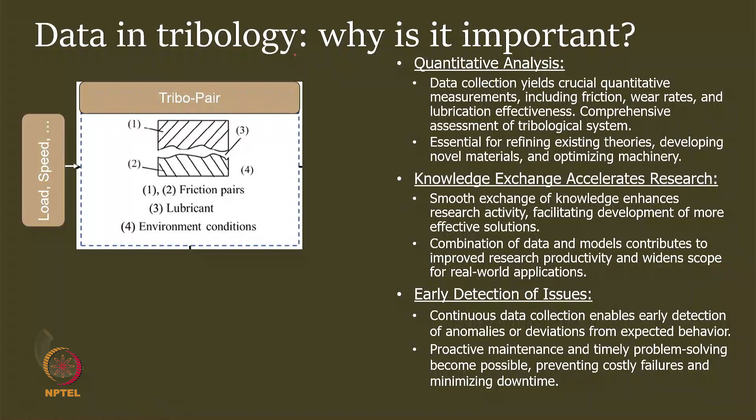Let me start with some initial topic on tribology. We say what is the real importance of data in tribology. We have already studied that in tribology we have two surfaces and we use the word tribopair. So 1 and 2 is a friction pair. To avoid wear and friction, or to reduce friction and wear, we require a lubricant. And we get a number of data related to this.

But the major issue comes from the environment. Most of the time environment changes from one lab to another lab, one situation to another situation, and that makes more difficulty for us. Reason being, even though speed and load parameters are same, environment parameters are changing, so results may be somewhat different. However, whatever we can extract from literature, we try to extract. This literature data will help us in a quantitative analysis. They will provide knowledge to us, and they can provide some sort of early model to detect the issues.

So coming to the quantitative analysis, data collection yields crucial quantitative measurements that include the friction data, coefficient of friction or friction force, wear rates, and lubricant effectiveness. The lubrication effectiveness can only be compared when we know the friction values and wear rate values properly. So overall, it helps in a comprehensive assessment of tribological systems.

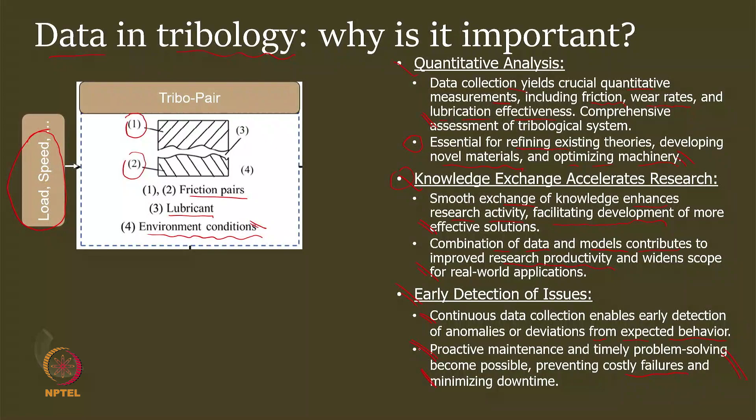Coming to the early detection, here again we require some initial models and online, or maybe offline, collection of the data. Those will help to provide the expected behavior and how the component is behaving in a slightly different manner, and this helps us to come up with a proactive maintenance strategy and solve the problems much earlier compared to costly failures and downtime. So we can bring an economic solution while keeping downtime minimized. So this is overall important to us.

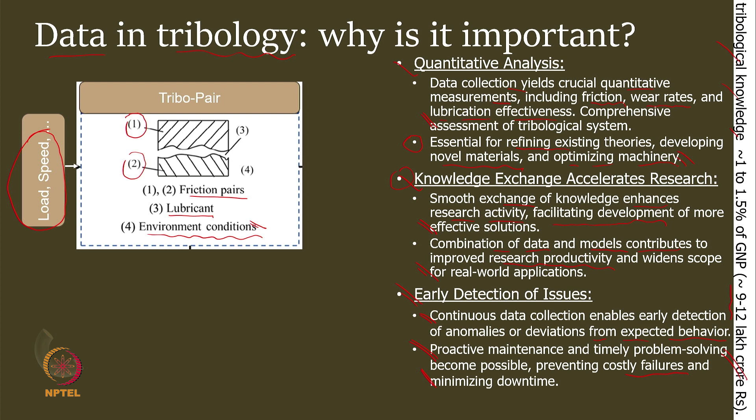We already studied that if we implement tribological knowledge in India itself, it can save roughly 9 to 12 lakh crore per year. That's a huge amount, and that's why we require this kind of knowledge. How do we go ahead with this? We generally get the signals related to friction and wear, and lubricant effectiveness can be calculated by whether friction is reduced and wear is reduced or not. We require a number of sensors. It can be a temperature sensor or pressure sensor. Here it can be an atmospheric pressure sensor as well as a contact pressure sensor.

We require a pH value, particularly for the lubricant. If it's getting acidic, we require pH values. We require environmental humidity, or if water is getting mixed with the oil, then we really require the value of that water content. Every mechanical element in the system will vibrate. We will detail this in the next lecture.

We get a number of wear debris, and if we have a wear debris sensor, it really helps. Nowadays a new thing is coming: image. You take an image and analyze it, and image analysis provides a lot of information to us. So capturing images and analyzing them is coming out to be a very big tool, or we say the sensing unit for us.

Many times we calculate the wear volume using the surface roughness or change in the surface roughness. We measure the viscosity, film thickness, hardness, and various parameters. So we really require various sensors, and these kinds of sensors can be utilized after what we have already captured, or dig out the information from existing literature, and after that we are assembling it.

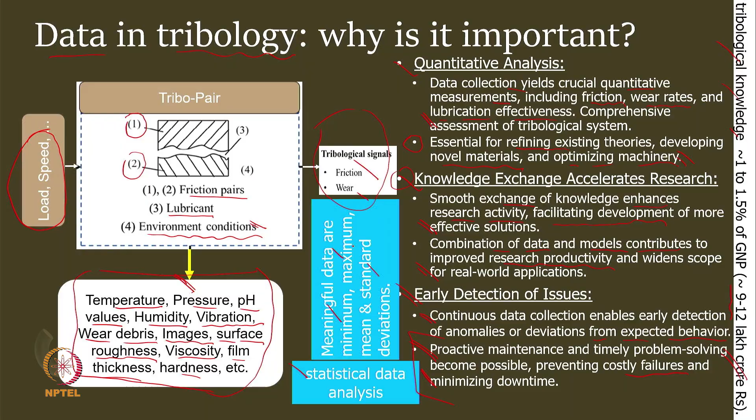Now, whatever we do, all the data with temperature, humidity, pressure, pH value, everything is statistical. We don't get exactly one value if we take different samples. That's why we go ahead with minimum value, maximum value, standard deviation, mean value. So whatever tribological parameter or data we are getting from a sensor remains statistical, and we need to quote minimum value, maximum value, of course the mean, and standard deviation.

So to plot those results, we really require more meaningful variation. We should really point out what is the mean value, what is the max value, and the standard deviation.

Now, when we talk about data, we need to think about what the data sources are. We divide them mostly into two big subdivisions: primary sources and secondary sources, and this data relates to friction, wear, and lubrication. Otherwise, there are many data. People talk about interviews and filling forms and all. We are not talking about those things. We are here talking only about friction quantitative data. Qualitative data we are not talking about in this case.

Let's take friction, which we have already described in an earlier lecture, but I am trying to repeat here. It is a measurement of the force resisting relative motion between two surfaces. It is very critical to minimize energy loss or go ahead with energy efficiency. We can use a load cell to get friction force data, and sometimes we use a torque sensor. In one of my setups I use a load cell, and in one of the seal units I use a torque sensor, and both give good results.

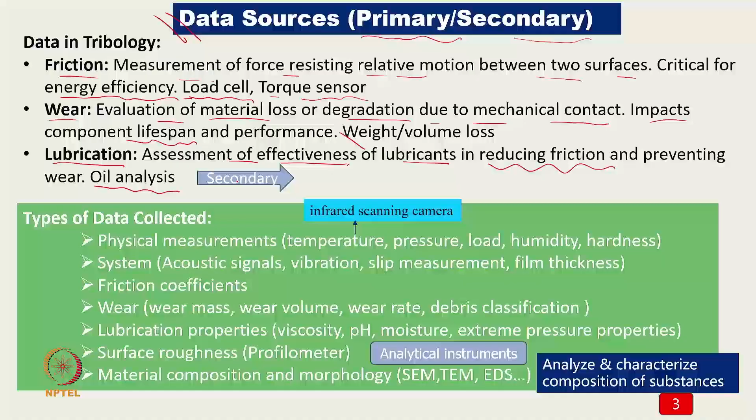Now coming to the secondary data, we have already studied this slide in lecture 20, and we found that there are a number of units or sources available which provide tribological data. Of course, it is not available openly.

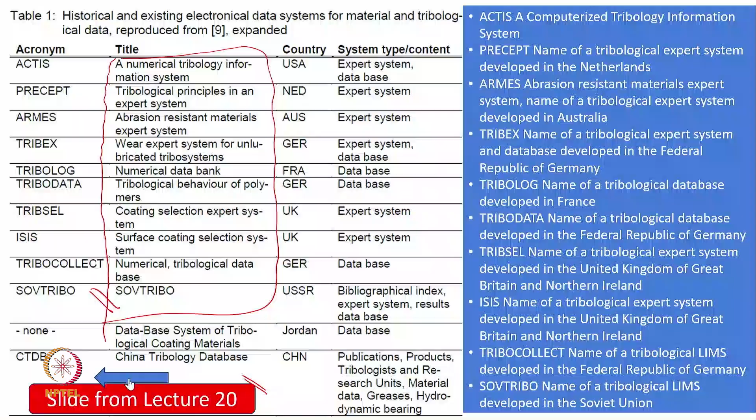But when we approach the authors, they may provide us some information on that. So if we are using this kind of data, or any research publication or any book which is quoting that data, we can utilize those data, and that will be called secondary data in this situation. And coming to the primary data, we need to collect data on our own.

Either we do the simulation, but I prefer to go ahead with more experimental analysis, because if I go ahead with theory and try to define that, again I will have some sort of simplification. So I prefer to collect the secondary data first, come up with some sort of model, and go ahead with some sort of experiments. So instead of doing too many experiments, I will do fewer experiments, but will get a lot of knowledge from existing literature, from a book, work on that, come up with the right model, so that our overall results are in our favor, or much more robust results.

Sometimes people use the words physical measurement, system measurement, friction coefficient separately, wear, lubrication property, surface roughness, and material composition. But again, these are subjective. We don't want to go ahead with this kind of division. We say, yeah, we can measure the temperature. The thermocouple, or these days we are saying that an infrared scanning camera is a better option, because it is non-contact; from a distance we can measure it. Of course, every time we require calibration. If I don't do calibration, it will not give good results. Pressure, load, humidity, hardness, these we can sense, or we can measure also.

Coming to the system level, where not only the individual but the whole system is getting involved, like acoustic signals, vibration, slip measurement, film thickness, where the two surfaces are coming into contact, and we are trying to measure the gap between them, and assuming this is the film thickness. Friction coefficient we already discussed.

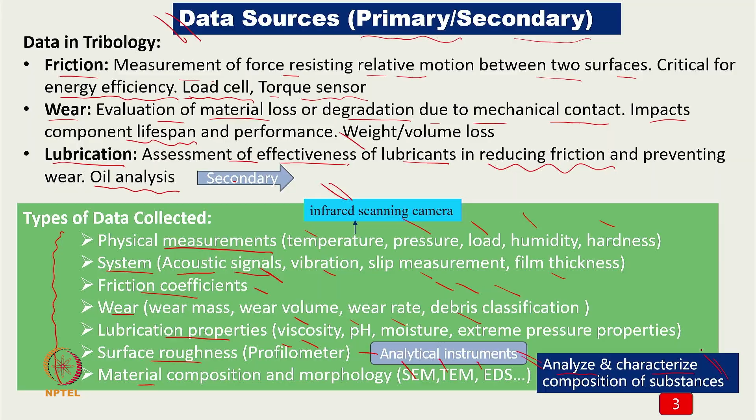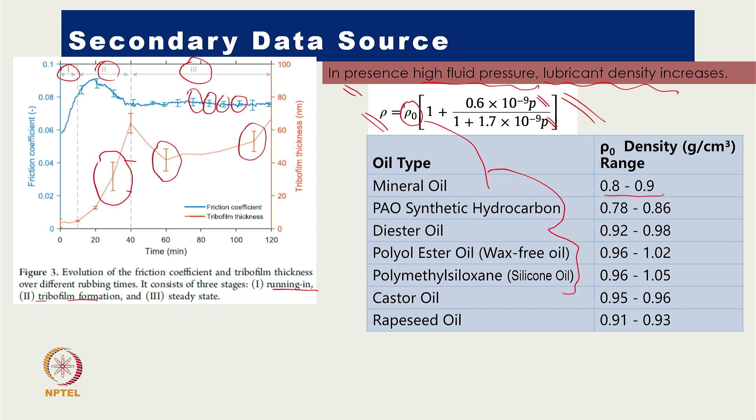Instead of going ahead with a firm or 100% belief in this relation, I'll take some sort of a judgment, and maybe directly or indirectly I'll try to verify this data. So again, any relation which is available in literature will help us to understand the system, but it cannot give 100% results to us. So that's why we say we learn from secondary data and then use our own experimental setup or our theory to come up with the right results.

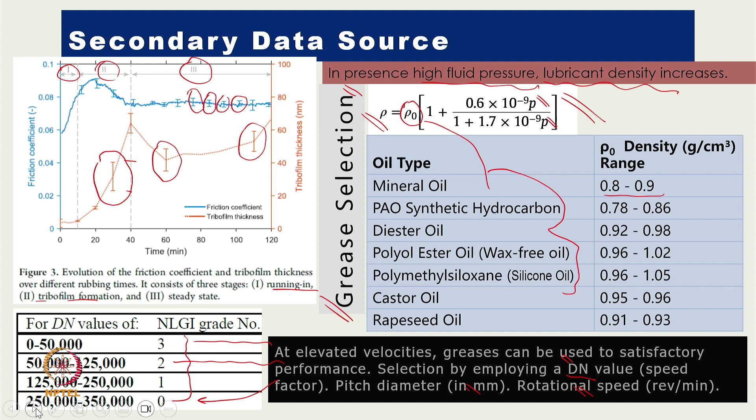It says very clearly that most of what people have given earlier was for NLGI 3, then NLGI 2, NLGI 1 and NLGI 0. Of course, we have double zero and triple zero also. Those are also greases; it's not that those greases do not exist. Those are greases we talk about as thin grease. They may require some sort of lubrication system, but not as good as a liquid lubricant. So you can see here that for a 2.5 lakh to 3.5 lakh DN value, NLGI 0 can be utilized.

So we learn from literature. One book, one article may give one piece of information, another article may give another. We need to extract the reason behind that. If the reason is valid, we should understand it and then implement it, and that's why we are saying machine learning algorithms will help us. The reason being, we are extracting information from various sources, and which source will give me more reliable results I do not know exactly. So we come up with a justification, tabulate everything, and finally decide how we go ahead.

Again, machine learning is continuous improvement. It is not that because somebody has written in a book that grease should be selected for up to 10 meters per second, that is the limit. It's possible I can go ahead with 15 meters per second, but what variation is required? How do I go ahead? That's where understanding or innovative thinking is required.

Now coming to the primary data source, generally we have environmental sensors, so temperature, pressure and other environmental things can be captured. We have a laboratory where we do oil analysis. In oil analysis we can measure the viscosity and FTIR, as per what my laboratory has, but it is not restricted to only this; there may be many more options. Coming to characterization, we use SEM, TEM, EDS, and surface profilometry, and many more are possible. AFM I don't use, but AFM is also possible. We use a tribometer to find the coefficient of friction and wear, or wear analysis, or the wear loss.

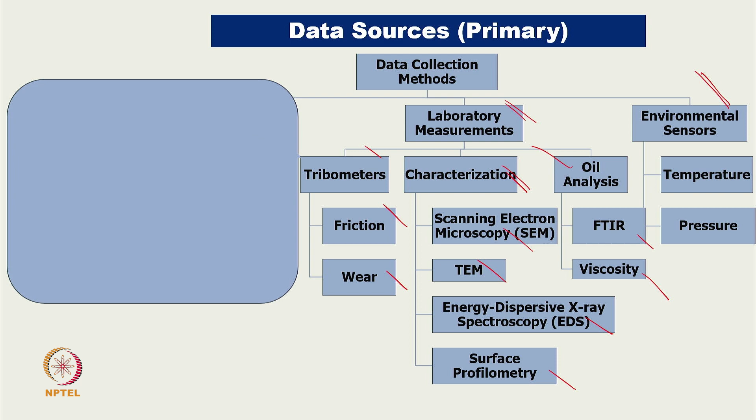Coming to this, what we mostly say is offline analysis. I'm using the word offline analysis. I can't do the experiment inline or in situ. Here we can use a measurement in situ, particularly for the tribometer, but again the tribometers are only simplified tribo pairs which we use. We don't use actual experiments, and for actual experiments, actual in situ measurement, we use a number of sensors.

Like, I use oil analysis using a sensor. We count the particles, we use a sensor. We have a quality index sensor. So these are the sensors. We have a load cell, we have accelerometers. So they can really give in situ information. What is the meaning of in situ? We say measurements are taken directly from operating machines or systems.

Again, I'm not simplifying the way it has been done in the tribometer. In the tribometer, we simplify the tribo pair so that I can conduct a greater number of experiments in less time and with less noise. Reason being, tribo pairs are in well-controlled conditions. In actual systems, actual machinery, we don't get that kind of complete hold on that, and there may be a number of causes also.

Let's take the example of the gearbox. A gearbox has gears. Maybe if it is a single stage, then only two gears. But if it is a planetary or a multi-stage, then more gears. Then every gear pair will have some sort of supporting elements. So maybe rolling element bearings, maybe some sort of seal, maybe with some sort of tension, so that it can be located properly. So overall a gearbox may have a number of components.

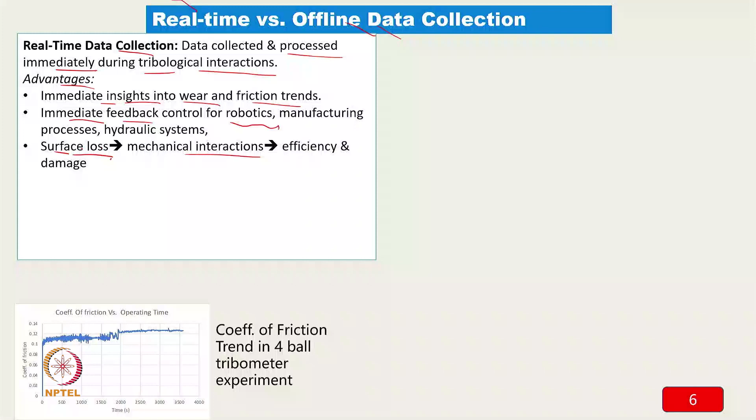So that's why we use in situ measurement. That's what I mentioned, that the future is that we should be able to predict the surface in situ, how the surface is changing with time, so that overall results are in our favor. If we are able to do that, then efficiency can be improved and the damage can be reduced to a significant level. I have shown in situ measurement of the coefficient of friction, which we did on the 4-ball tribometer. You can see here initially the coefficient of friction is roughly 0.1, and with time it has increased to 0.12. So this is very important to see how the changes are happening.

Now, in this case, I have given a couple of examples: we do wear measurement using the wear debris, by counting the number of debris and size distribution, and we also do friction measurement directly in engine components, because we need to really come up with the right result, and which interface is really giving a high coefficient of friction. That's more important. We also do oil monitoring online. We have sensors, so we do it.

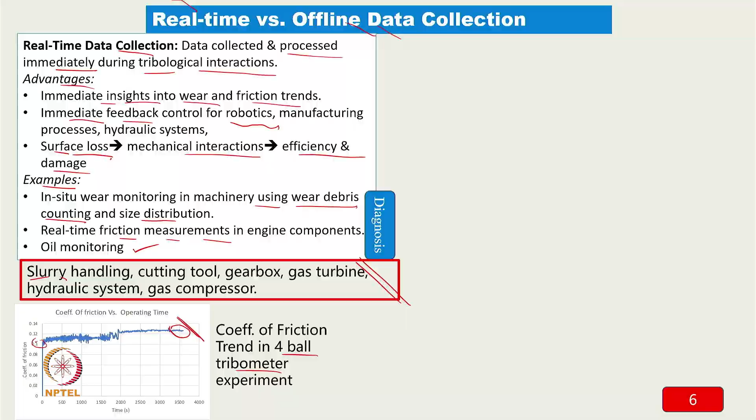Now there are a couple of systems where it is very essential to go ahead with in situ measurement. Say any equipment which is handling slurry: if it is not costly, then there is no need. But if it is costly and the reliability requirement is on the higher side, I'll go with in situ measurement. Like machine manufacturing, cutting tools, or gearboxes, particularly a gearbox which I'm not able to reach immediately, like a wind turbine gearbox at a very high height. A gas turbine, where the temperature is very high and we cannot reach directly. Gas compressors, hydraulic systems. These are the units where we essentially require real-time measurement.

Of course, these measurements are also required along with diagnosis capabilities. So we keep getting data, and then we should have an algorithm to diagnose what is really happening. Coming to offline data, this is also very important. It's not that we get only inline data and then we'll be fine. Offline data is also important. We say it is data collected and analyzed after a tribological event which has already occurred. What are the advantages? We get overall analysis, so here overall analysis is important. Let me give an example.

When we are using wear debris analysis, we get some data, some value, because whatever the sensor is able to record, that value comes to us. But sometimes wear debris generation is much higher compared to what the sensor captures, so we get more wear loss as a result. When we do offline analysis, we get a greater number of debris particles, and that is very important to understand. And when we do this, we are also able to keep a record, and it will be useful for maintenance purposes or for historical purposes; in short, it can be used for long term analysis. So recording is very important.

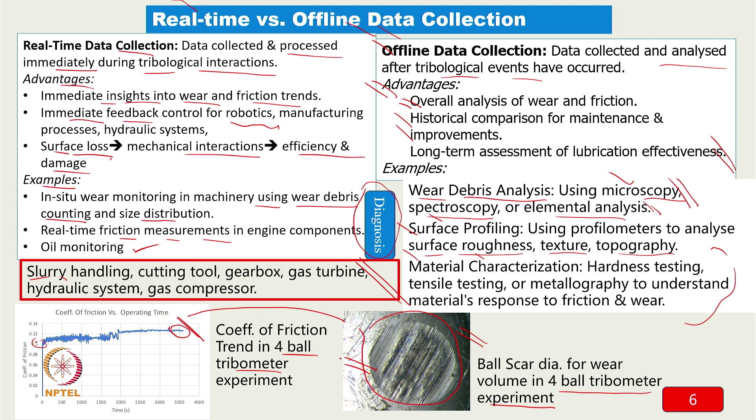This is important. I'm showing one of the images which we collected from 4-ball tribometer experiments. Here the ball has roughened completely. You are able to see that roughness on this surface, a very rough surface after the testing, and thus we do not get an immediate response or in situ response. In situ we are able to get a coefficient of friction, but why the coefficient of friction is behaving like that can come when we do a post analysis, after completion of the experiment.

There are several benefits of collecting data. It provides insight into system behavior. It allows the optimization process to be started, and it really gives a verification of the theoretical model. It also ensures quality control. It reduces the cost. One of the important things is that it really considers the environment and safety. It is very important, and it also provides an opportunity for innovation.

Now, insight into the system behavior, reason being that tribology is a very complex phenomenon, and we are not able to understand all the interactions immediately and how they will behave. Once we start collecting the friction, wear data or lubrication data, temperature data, or even humidity data, then we can really think about how the interactions are behaving, and we can monitor the interaction in real time.

And it also gives the different kinds of variables, like I'm initially assuming 10 variables will affect the overall system behavior, but later we realize 5 variables are much more sensitive compared to the remaining 5. So that means whatever we initially hypothesize, we can also correct, because we understand the system in a better manner.

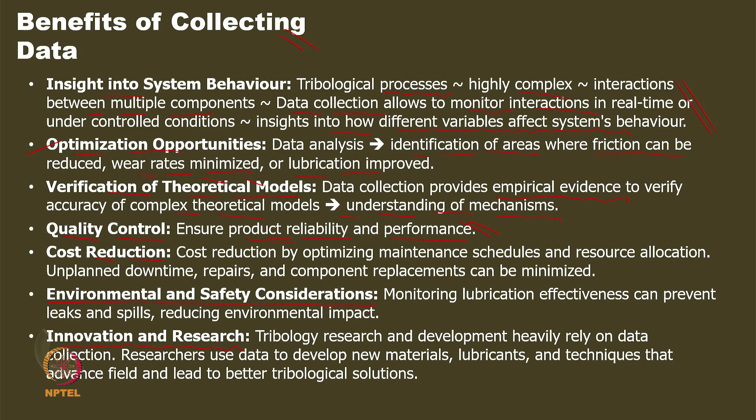However, if this kind of cost is on a higher side compared to the tribopair cost, naturally we will not be able to do it. So there is a need to go ahead with innovation. Wherever sensors are getting costlier, and the system responses we are getting from sensors are getting costlier, we really need to innovate. We need to bring some sort of cost effective sensor, cost effective solution, cost effective strategies in the situation. If we are able to do that, we will be able to save the cost.

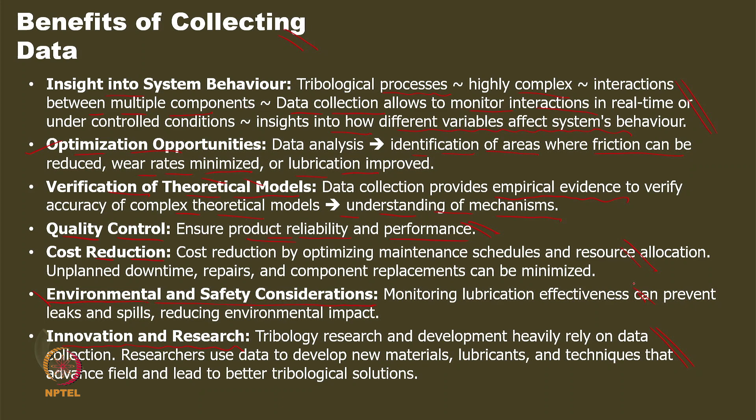And as mentioned in one of the earlier lectures, we want to refabricate so that the system can be used, or the component can be used, or the surface can be reused. If that's possible, then it will naturally save the environment and we will go for more sustainability. Even if failures are not happening, it is going to help us a lot. And now in this case, one of the important things is sensors, which have a huge market. The compound annual growth rate is around 18%, which is huge.

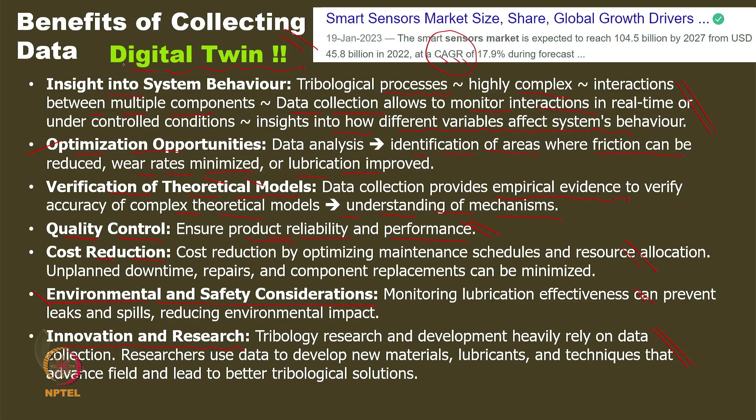And there is a new term being coined these days: digital twin. Can we replicate whatever is happening in the real system in a simulation system? If that's possible, it will help tribology in a big way. That's why I'm keeping two slides on digital twin. When we think about a digital twin, it enhances tribological knowledge. It's unfortunate that awareness of tribology's potential to reduce CO2 emission is not known to many people. It also enhances sustainability, and that information is also not available to many people.

Now you talk about power plants, automobiles, turbines and wind turbines, gearbox failure. Everywhere energy efficiency and sustainability come from a friction and wear point of view. That means tribology plays an important role. Let's take one example of the wind turbine. It's now a growing source of electricity because we are talking about renewable energy, either solar or wind, and wind and solar are playing a major role. Now they encounter downtime and efficiency issues. What are the reasons? The major reason is the gearbox.

They mention that around 76% of all the failures are because of gearbox failure. Again, gearbox failure is because of bearing failure. Even though it is a gearbox, gears are not failing, but bearings are failing first. So you need to know about those things. Now why is it happening? Because there is fluctuating wind and grid load. The load is changing continuously. That means there is a dynamic condition. Predicting the dynamic condition may not be easy. So we really require in situ sensors and in situ actions.

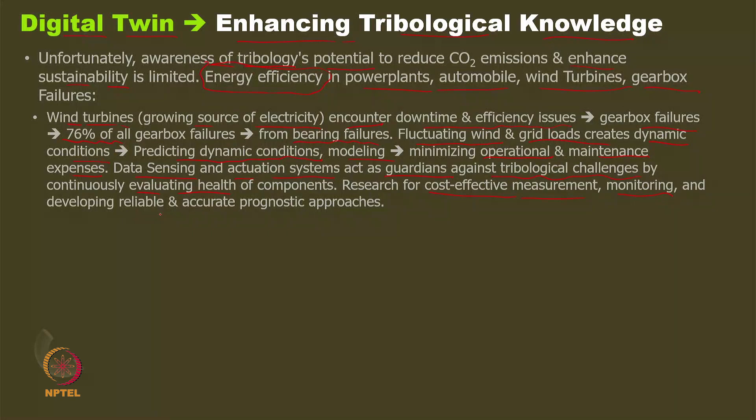We require monitoring. If wireless monitoring can be done in a much more effective manner, or we can provide some sort of digital twin system, where what is happening on the top, at the height, is projected in the lab, and not only the sensing unit but a replica of the system we are operating, then it will provide much more optimum results to us. So that's the future. That's why we say it develops reliable solutions and accurate prognostic approaches.

Now we are talking about something like a cyber physical system in tribology, because it's the most complex system, and we want to understand what's happening at the nano level, so the best is to go ahead with a cyber physical system. That's why cyber physical system in tribology means modeling a physical system in a digital environment to simulate the real machine behavior.

So this is what we are saying: a type of cyber physical system is a modeling of a physical system in a digital environment to simulate the real machine behavior. Not only this, when we have a physical system, it has a number of sensors, so we are able to see each and every sensor properly. We are able to model and then do continuous monitoring. Continuous monitoring, continuous control, and optimization of equipment performance is possible using this.

This also helps to enhance the service management, increases the product life, and in this case whatever software or model we had developed earlier also keeps getting updated because we are getting all the data. So initially we designed some system, we made a model, and then we made a physical system. Now the physical system is getting engaged in the real situation. What is happening in the physical system, that information keeps coming to the software,

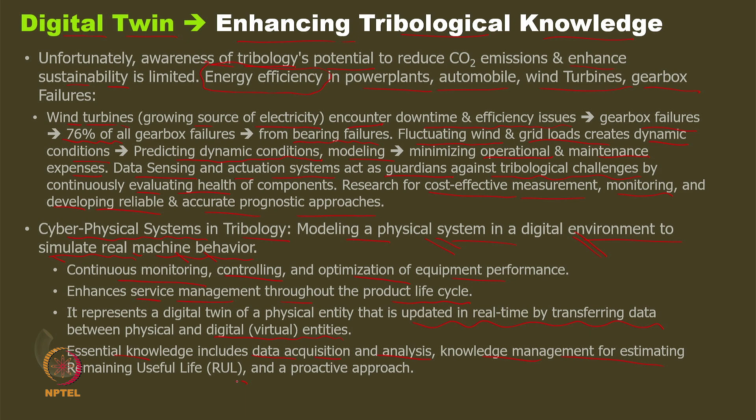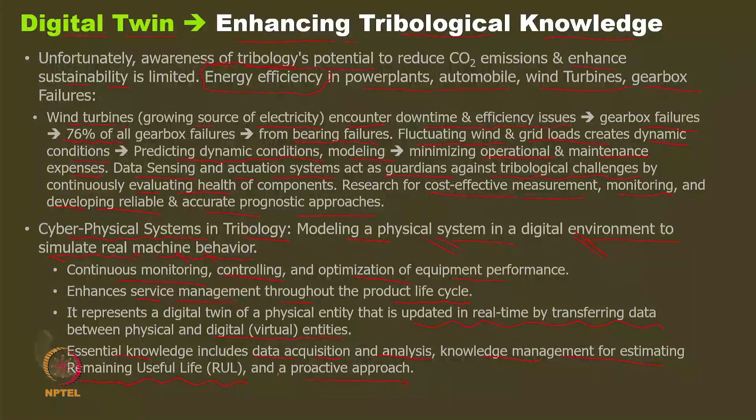Essential knowledge in this case includes data acquisition, analysis, and knowledge management for estimating. Then one of the more important things is the remaining useful life. Whether the remaining useful life is 5 hours or 50 hours or 500 hours, that can be estimated. So this is very important to us. It is really helping to enhance the tribological knowledge. Now what are the challenges?

I find that there are some challenges, particularly when we do work. Here we are estimating a smooth surface is required, but how smooth? When we go with a digital twin, it will highlight the need for a sufficiently smooth surface finish for effective lubrication. We studied earlier that nanoparticles are helpful, but nanoparticle size should be comparable, or proportional to the surface roughness. If surface roughness is decreasing significantly, the nanoparticle size also should come down, otherwise it will not be effective. That can happen when we talk about simulation, or we try to make a digital twin.

And it addresses, in case there is some roughening problem happening, how the lubricants need to be changed; that information should come to us immediately. Otherwise those units will be subjected to adhesion or seizure. Sometimes if there is an abrasive particle, how to remove it, how to filter it. Maybe once in a while we need to filter the complete unit, or we need to change the lubricant. That will really save a lot. So a digital twin is very important.

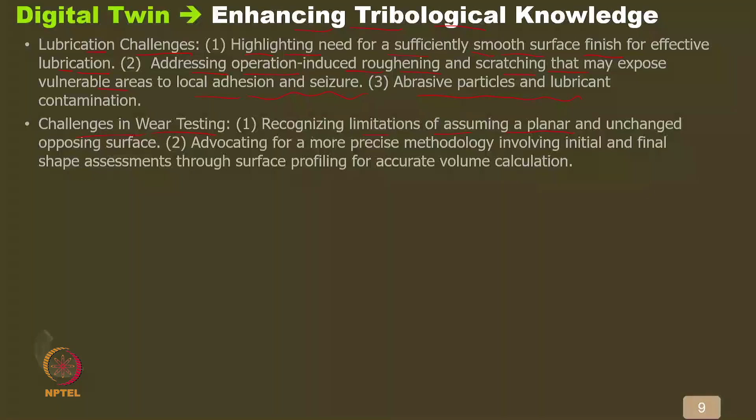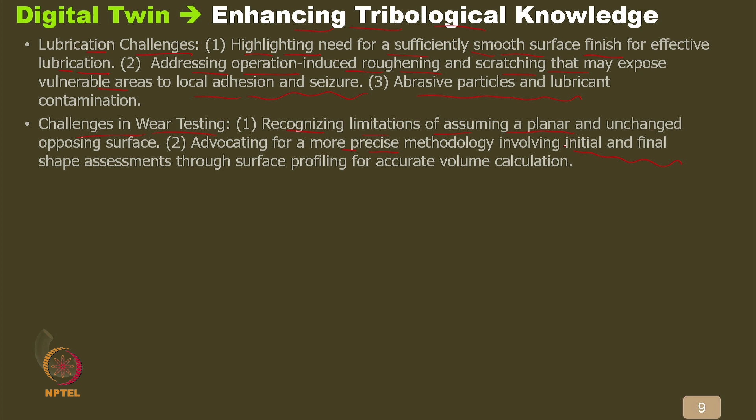Similarly, we need to deal with the challenges in wear testing. The major thing is that many times we do a four-ball test and then we assume there is a planar surface and the surface is not roughened. So we calculate wear volume by assumption, by formula, and in reality it is not happening. That is a limitation of existing units, and that's why a digital twin can solve those kinds of things. And we really require shape assessment also. Maybe we'll show in the next lecture one of the shapes of the ball.

You can see a very rough surface coming out, and because the shape is changing, we cannot really estimate wear volume appropriately. So in classical traditional tribology we have been assuming a lot, while if we are able to implement a digital twin, we will not assume, because there the matching has to come. My virtual unit should show the same performance as the physical unit. If there is a mismatch, naturally there are modeling issues and we need to model it. Of course, in one day a model cannot reach the final level, but with time it should happen that way.

So that's why we say digital twin is very important for us. We discussed wear loss earlier: adhesion and fracture, abrasion and fracture, fatigue and fracture, and surface alteration also. Now if adhesion is really happening, the digital twin should be able to show us. If abrasion is happening, the digital twin should be able to show us. Fatigue, again, it should be shown. Again, it really requires all the sensors and really good models. Otherwise the results will not be useful to us.

Now there will be direct or indirect measurement. In this case, particularly adhesion, we know adhesive force is when we need to break the junction; there will be shear stresses, and of course there will be tension also. So are we able to simulate those situations? If there is a crack, are we able to simulate the crack propagation in a digital twin? If it is, then it is good. If it is not, then we need to think how to model the system properly.

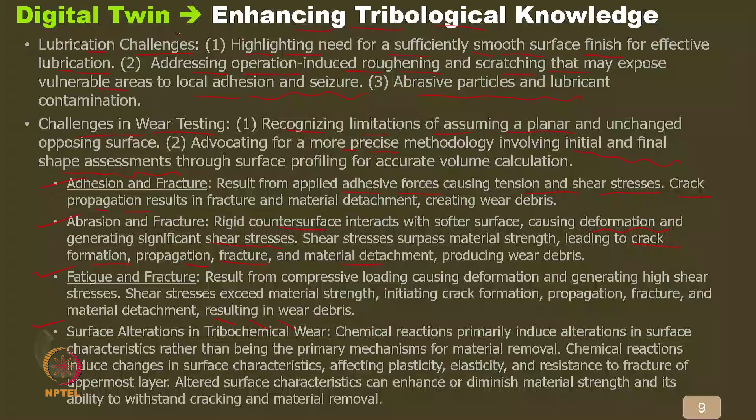One more thing is tribochemical wear. Whenever chemistry comes in or a tribochemical reaction happens, it will change the surface. So here the surface should be captured, and how the changes are happening. Now the surface goes from a ductile surface to a brittle surface, and again there is a mechanical action removing this debris, and that needs to be captured. So overall this will be helpful if we have a sensor unit, data collection, data processing, and good models. It will really help, and finally it will land us at the digital twin, which is the future of every type of system.

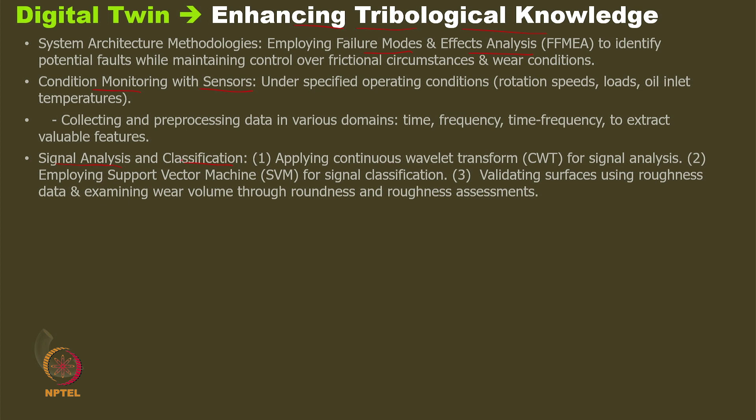Now, another one is failure analysis. We have been utilizing failure mode and effect analysis. If we go ahead with that kind of system architecture method using a complete sensor unit, and we do continuous monitoring using the sensors, and then process the sensor data in a proper way, we get overall good results. So overall data collection, data analysis, data processing and interpretation is very much required, and if we are able to learn all those, surely we are moving to the cyber physical system, we are moving to the digital twin that will really help us.

So detection of the cracks, material transfer. Now we know very well that even 2D materials, particularly 2D solid materials, transfer a layer onto the other surface. So they will cause wear, or maybe the soft metal will transfer and then come out from the surface, becoming some sort of debris. So this is important for us to understand, wherever this happens, and to be able to quantify the damage.

One more mechanism we talk about these days is the self-healing mechanism. If the lubricant has a self-healing mechanism, that will really help, and that really requires in situ data. And if we are able to process the data, we are able to see whether self-healing is happening or not; only then will more innovation or newer material generation come. Otherwise it will give indirect measurement, an indirect direction, but it will not be able to give the right results.

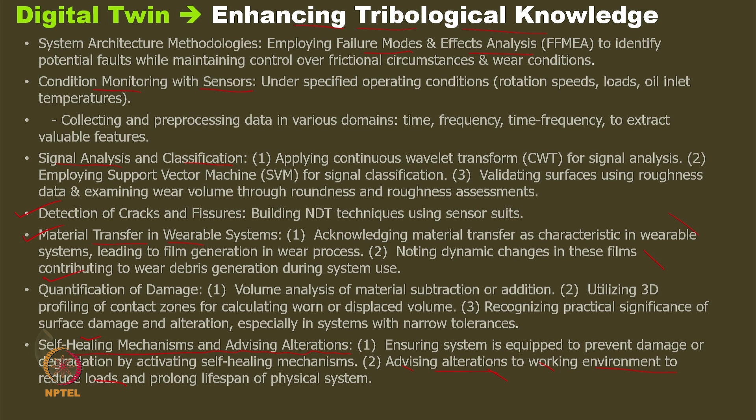Now in this situation, we need to think about what to do if we are not able to go ahead with self-healing, or maybe solid lubricants are not sufficient. In that situation also, if we go with a digital twin, it will allow us to think about reducing the load, so that the overall lifespan of the component of the physical system increases. Now if there is a crack which is propagating because of an increase in the load, if I reduce the load, quite possibly the crack may not grow, and the life of the physical system can be enhanced.

That's what we are saying. If we are able to really monitor everything in situ, it will really help us and it will give a better knowledge about the tribology. It will help us to go ahead with better results.

Now, as I mentioned, in every case, we prefer to go ahead with experimentation as a primary data source. And here I am talking about only wear measurement. In the next slide, maybe we will be talking about friction, then lubrication. Now, for wear measurement, we do a direct measurement. We can measure the weight loss.

We already have covered something like wear of the pin, wear of the ball. We have already done it, and we measure the dimension. It can be length, it can be width, it can be depth, and to figure out what is the variation, we also go ahead with surface profilometry, and this has all already been done.

Now coming to the indirect method, we analyze the wear particles, and then use appropriate filters to come up with the right solution. We also have spectroscopy. In this case, X-ray spectroscopy, or FTIR, Fourier transform infrared spectroscopy, can be used for this kind of analysis. Volumetric, of course, here we try to figure out first the dimension and then use a formula, so it is an indirect method.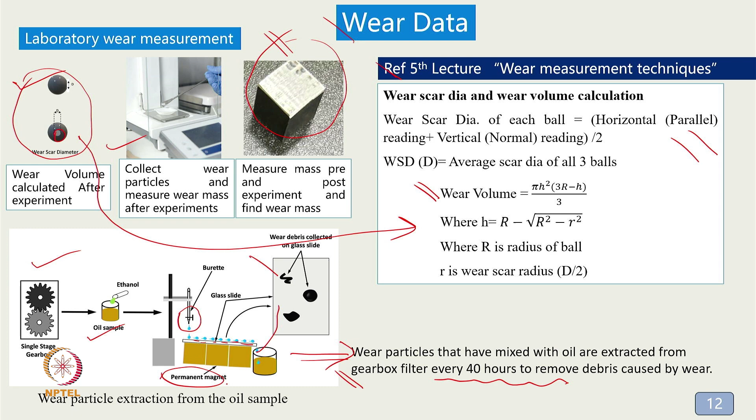And in this case particularly, we are showing we measure after every 40 hours, but it can be anything. It can be 10 hours, it can be 20 hours. Every lab has a different way to find out the results, so that can be any data. Now here we are trying to give in situ data. Earlier I was using post analysis.

In this case particularly, we use a metallic wear debris sensor. We have an oil sensor suite, and then we try to figure out particles, particularly ferrous particles, which range from 40 to 400 micron. We ignore less than 40 micron, because our sensor is not capable of measuring it. New sensors are able to measure 20 micron, but I don't have that in our lab.

Of course, the sensor model has also been mentioned, and what is the principle of the sensor? They go ahead with magnetic field calculation: with enhancement of the magnetic field, what will be the wear particles? Of course, it needs to be calibrated again and again. It is not that once you fix it you will always get a correct reading. It has to be calibrated again.

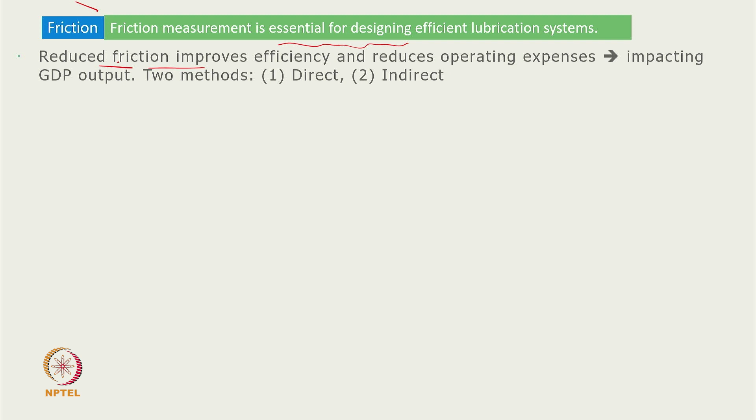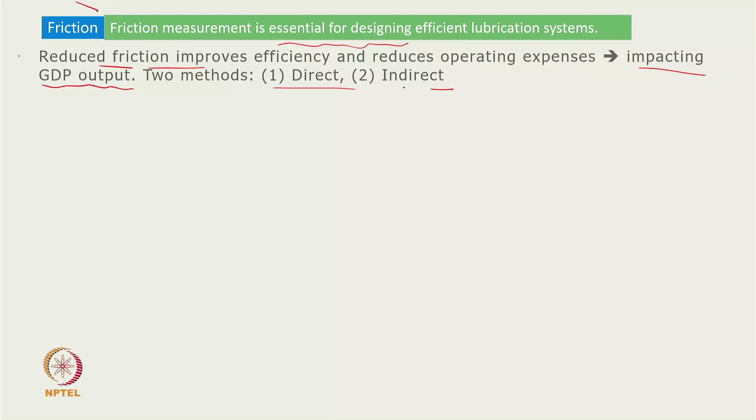Now coming to the friction, we see that it is really required for the efficient overall design or tribo design. We need to calculate, and then think about how to reduce the friction and improve the efficiency. The reason being, we already studied that because of friction losses we have huge GDP losses, and we really require to measure it. It can be indirect, it can be direct measurement. For direct measurement, we use, as I say, the load cell, we use torque sensors, and in tribo testing we can do a direct measurement.

So we have done in one of our 4-ball testers, we used 9 oil samples, and you can see the coefficient of friction, and you can see here the variation; nowhere is it a constant value, it is continuously fluctuating. Now suddenly in between there is a fluctuation coming, the value is increasing, quite possibly the wear debris comes into the picture, and that gives random results. So it can be outliers also, and it can be removed. When we go for post processing, it is really required to remove this kind of data and come up with the right results.

Coming to the indirect measurement, temperature rise is one of the indirect measurements. If I'm able to find the temperature at the interface, I can say temperature may be increasing because of increase in friction, or decreasing because of reduction in friction. And sometimes people say there is a relation between friction and wear: if I find more wear, friction is increasing; with lesser wear, friction is decreasing. But these are different things, and different sensors have different calibration. And sometimes we use power loss directly from the motor; we find the voltage and the amperage, and friction losses can be measured indirectly by measuring the power losses.

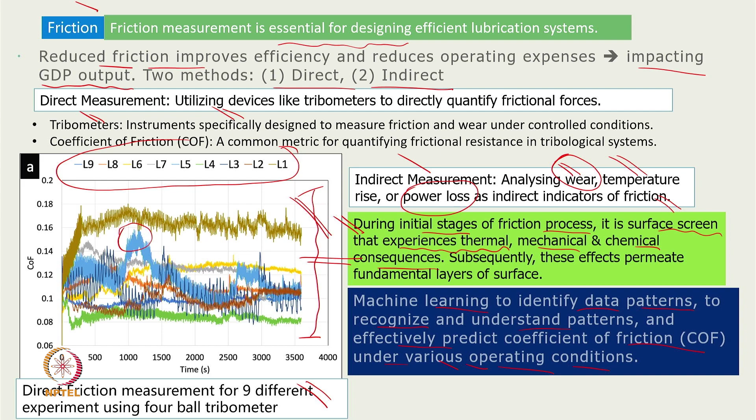However, in existing literature, it is very clear the coefficient of friction cannot be predicted so well. Of course, people have given a number of theories and models, but there are no consistent results. In one famous book, Ludema's book, he has given 2000 relations related to wear, and he says that even wear prediction is not easy. There are 2000 relations available. Which relation should be believed?

So it is important to understand that there is already a gap, a tribology gap, and we need to bring machine learning to bridge that gap, so that overall results are much more favorable, and whatever cost saving is estimated should be achieved.

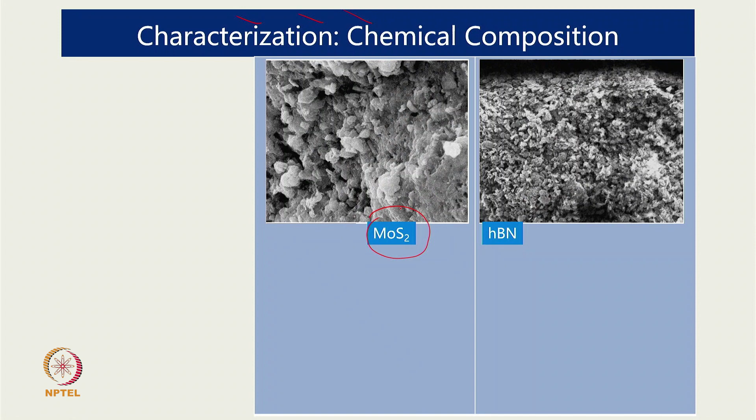Now, coming to the third, characterization. We use analytical equipment. Here I'm just showing that we have purchased two nano-level particles, MoS2 particles and hBN particles, and we are trying to figure out their chemical composition. So we use EDS to analyze the purity of the MoS2 and hBN, and EDS is a good solution for that.

The reason is that EDS uses a high-energy electron beam, so atomic-level interaction with the material happens. In particular, the material's inner-shell electrons ionize, and then they emit X-rays. If we are able to capture and analyze the X-rays, since they are unique for each material, that gives a response to us, and that has been shown here.

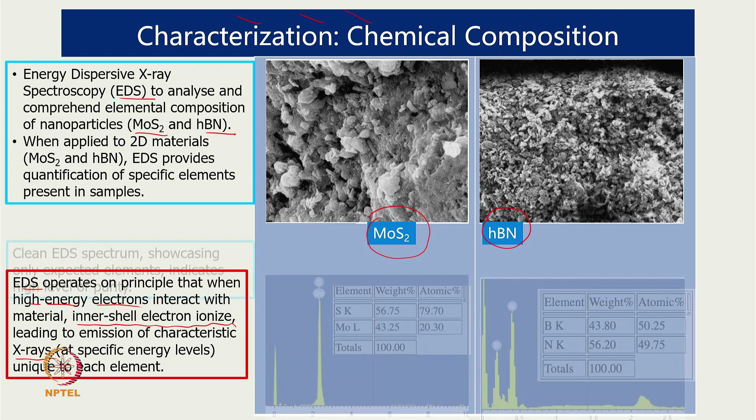In the case of MoS2, we are getting two peaks. Sulfur is around 79.7% atomic, and molybdenum is around 20.3%. Coming to the weight percentage, it is 56.75. So this shows that the purity level is good.

Coming to the hBN, here we have N and B, and we see that B is around 50% atomic and N is 50% atomic. Coming to weight, it is 43.8% and 56.2%. The x-axis is electron volt energy, and every material gives different results. Here we see a much lesser value compared to this value.

Now we have another analytical instrument, Raman spectroscopy, to find out the purity level of nanoparticles. So we use Raman spectroscopy to characterize graphene, RGO, MoS2 and hBN. This was taught in an earlier lecture also. In Raman, we do inelastic scattering measurement of monochromatic light, and the monochromatic light we use is 532 nanometers.

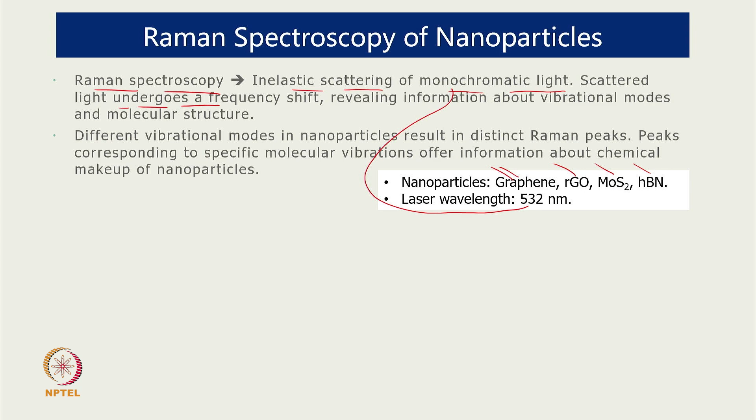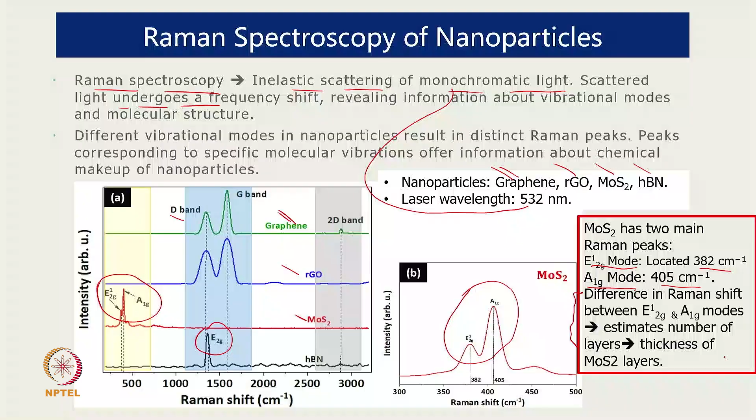So MoS2, particularly when we magnify or increase the size, we are able to see that there are two modes. The E1 2G mode comes around 382, and the A1G mode comes around 405, and this is coming because of the difference in the number of layers, or we find some agglomeration happens, and that's why this kind of difference is coming.

Coming to the graphene, we have already seen the G and 2D bands, and the G band occurs at something like 1586. The purity level is basically exhibited by whether the G bands are strong or not, and this ratio has to be greater than 2. If G by 2D is greater than 2, then its purity level is on a higher side.

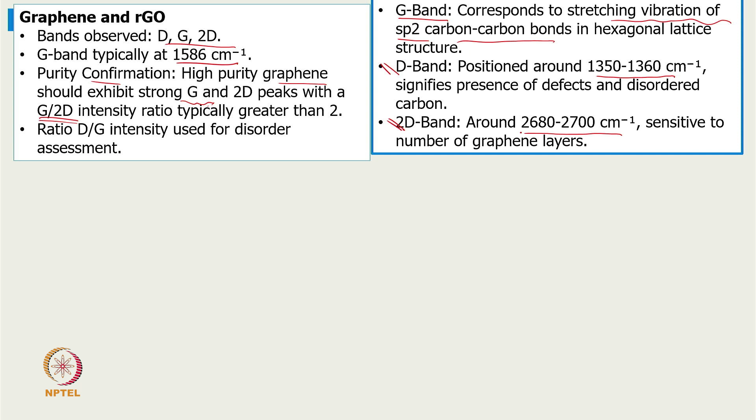The G band shows the stretching vibration of the sp2 carbon-carbon bond in a hexagonal lattice, and the band occurs at something like 1350 to 1360, and 2D comes around 2680 to 2700, and this is basically sensitive to the number of graphene layers. So we can find out the thickness of the graphene layer, but again we need to confirm using the TEM, which we did in an earlier lecture. We presented that the number of graphene layers is very easily seen using the TEM.

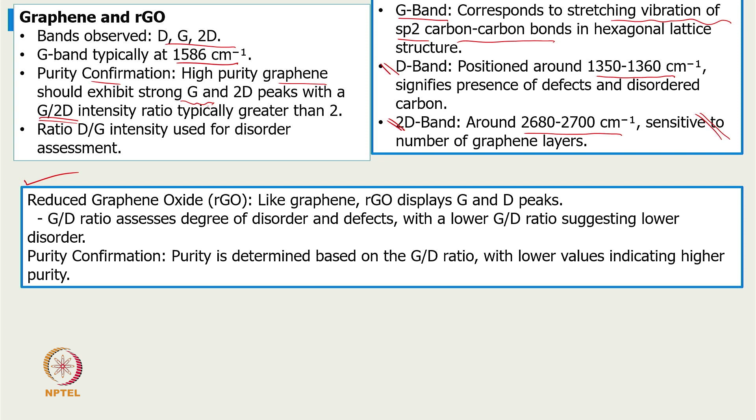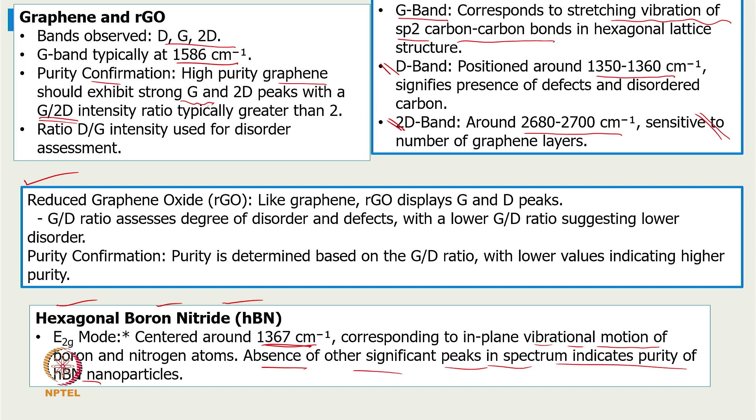Now here the reduced graphene shows a better purity level compared to the graphene as such. Coming to the hBN, hBN shows the highest purity level. It is centered around 1367. Again, in Raman spectroscopy we look at the vibration mode, using laser monochromatic light, and we try to figure out the inelastic scatter, and based on that we are calculating. So here the absence of other significant peaks in hBN indicates a high purity level for hBN.

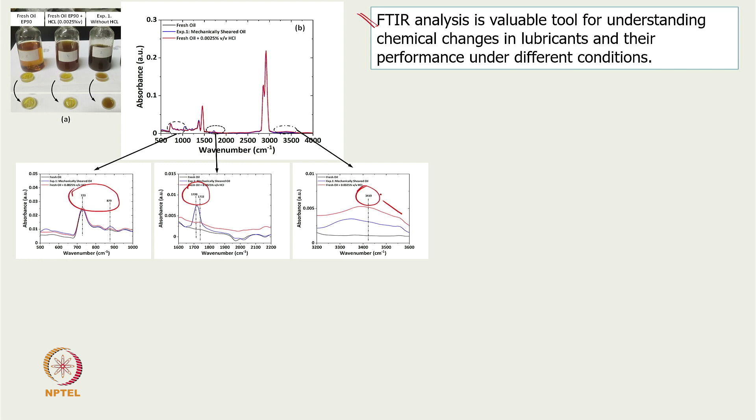Now, similar to Raman spectroscopy, we have infrared, that's Fourier transform, FTIR, which we use for oil. This figure I have shown earlier, showing two peaks here and then one peak; this is related to water and oxidation, and this is compared with an available table. It says very clearly the wave number 723, which we are getting here, is caused by some sort of CH bending or oxidation. So this is the comparison.

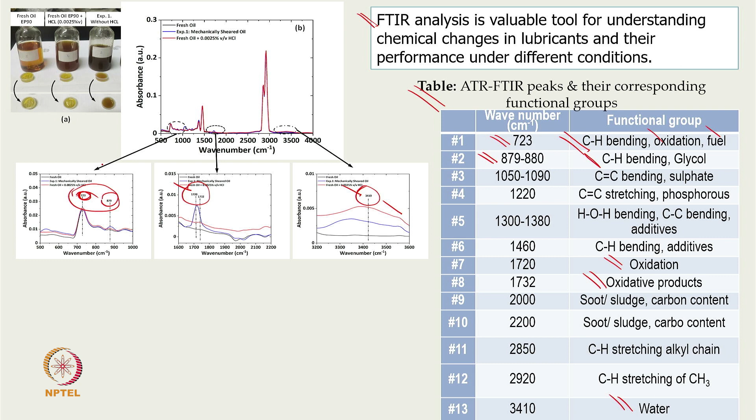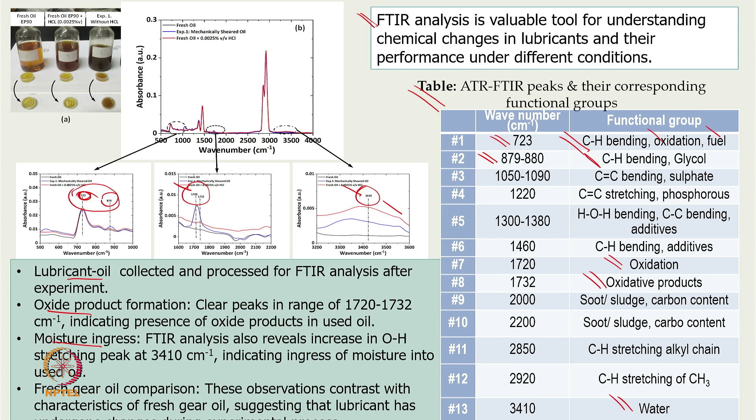The second one is 879; 879 and 880 again are CH bending or maybe the presence of glycol. Here 1720 is also oxidation, 1732 is also an oxidation product, and 3410 is water. So this is a used oil comparison, and our used oil says very clearly that the lubricant utilized in the experiment has oxide formation, it has moisture ingress, and it's not really good, and maybe we can change this oil.

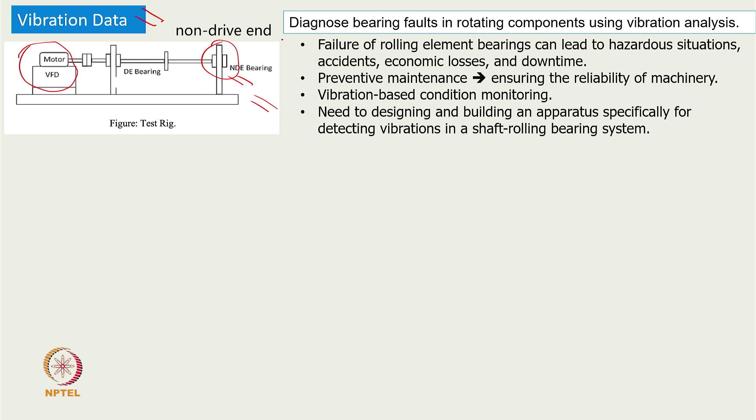Now coming to the final one or two slides, whenever we try to diagnose any bearing fault or any fault, we should have some sort of setup. Here we are showing a unit where the motor speed can be changed using a VFD, and there is a test bearing over here, and we try to figure out what is really happening. We get a vibration signal at a shaft operating speed of 32 hertz, and 12 seconds of data have been captured.

Of course there is a lot of data, and you are able to see this is acceleration data. Here the maximum value comes around 0.6, while in this case the acceleration value goes up to 1.5, and this is what we are saying: this bearing is faulty and this bearing is healthy, and this is very important. In the time series, we see the magnitude of acceleration increasing, but that may happen for some reason. What is that reason? We don't know. The bearing is getting faulty, that's fine. Now we need to really think about the defect frequencies of the rolling elements.

We will be exploring a little bit more in the next lecture, but I'm just trying to give you some overview. If we do an FFT of the time series, whatever has been given, then we can figure out what will be the faulty frequencies and why the faults occur. Otherwise they will not be easy.

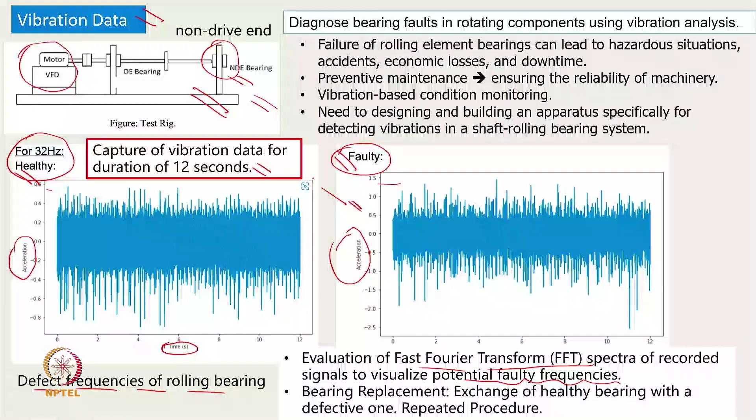So in this case, experiments: first we have a setup, this setup is available in a lab. We first go ahead with the healthy bearing, then we go ahead with the faulty bearing, and we capture the signals. And for students we say that you can see what is the frequency analysis and what is the time analysis, time frequency. The time has been shown, and frequency I'll be showing after a few slides.

We use this kind of theory also. We say the rolling element bearing which has been utilized has a number of components. Now if you go with the frequency, I can get a ball pass frequency outer ring, a ball pass frequency inner ring, ball spin frequency, or we get one related to the cage also. So these are the frequency response. So if I use frequency signals, then I may get some sort of response.

So if it is coming up related to the BPFO, then I will say the outer ring is getting a fault. If it is coming corresponding to BPFI, then I say the inner ring is getting a fault. If it is getting FTF, then I say the cage is getting a fault. So this is very important. We teach theory and then we say, yeah, you go ahead.

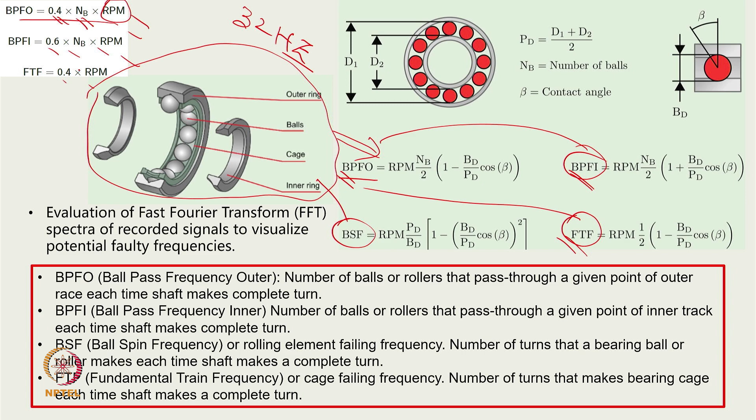Many times we don't have all the details because seals are closed. Then we will use a rough sort of thing: number of balls, what is the operating speed. In the previous case I showed, 32 hertz is the operating speed of the shaft. Now the number of balls, mostly it's 8 to 10, and then if you multiply, roughly I may say a heuristic model is available, and compare the results.

Now before going ahead with that, we know that there are a number of noise parameters. We may have wrong sensors or inaccurate sensors, that's why we require calibration every time. We do have temperature variation, humidity variation, pressure variation. The machine which we are operating sometimes operates alone and sometimes 10 other machines are also operating. So mechanical vibrations from other systems may get transferred to this system, and there is a possibility of multi-sensor interference also. So noise is also possible.

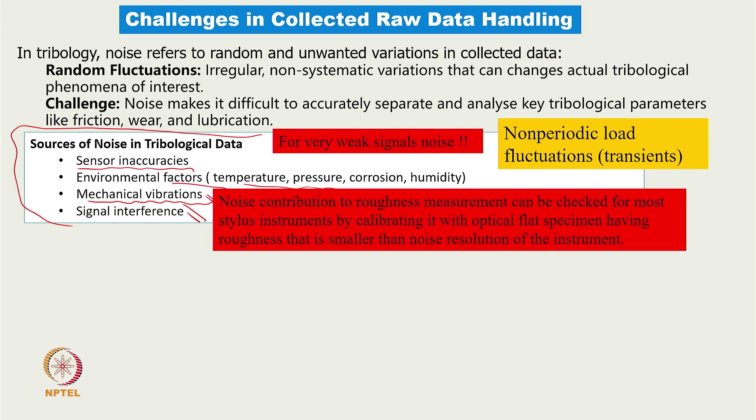How do we handle noise? We will be learning in the next lecture, however we say that we really essentially require removing the noise. That's why we require data cleaning. Moreover, many times we ask how much data, because each second we are transferring maybe a thousand data points, and a lot of data will come. What do we do with that data? So we need to really think about the functions which are appropriate to come up with the right results.

So that's why we say we collect the data, then we clean the data, and then we transform the data. Like FFT in this case: from the time series or time sequence data which we are getting, we transfer to the Fourier transform, and then we get better results. And after that, we go ahead with some sort of filtration, high frequency filtration, low frequency filtration, and then data can be reduced to more meaningful values.

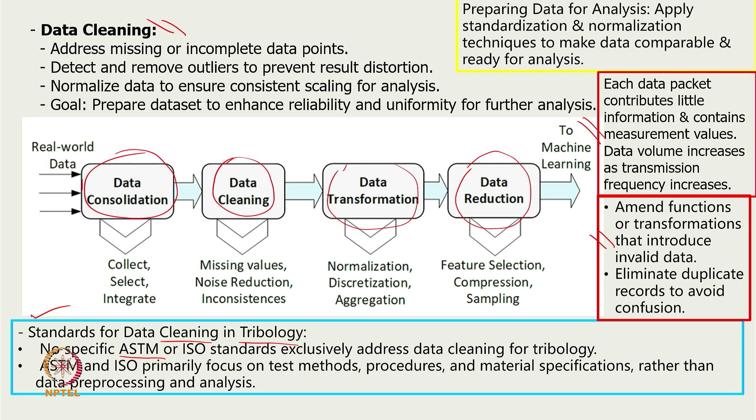So the first thing that comes is, is there any standard available for data cleaning? Unfortunately, we don't find much standard available. We don't find any ASTM standard or ISO standard which can help us to clean the data. So next lecture I'll also tell you how we go ahead with the data cleaning and get better results.

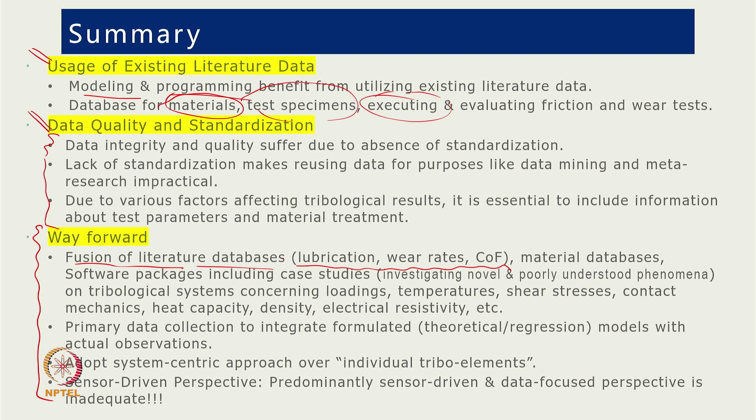Then what is the way forward? We have so much data. If possible, we go ahead with fusion of the data. We try to interconnect all the data. Are we able to come up with some correlation? There are material databases and a number of software packages. If I go ahead with coefficient of friction or wear analysis, there are a number of software packages available that we can utilize. But the question is, they do not really provide all the results.

There are also some case studies, but the question is, are we investigating only novel case studies or failure case studies also? I'll give a little more emphasis to failure case studies, because failure case studies also teach us a lot. And then we give a little more emphasis to primary data collection to find better theoretical results or regression models, which we'll learn in machine learning. One more thing people confuse is that they go with individual tribo-element analysis, say a gear pair. But a gearbox has a number of elements. So we should go with a system-centric approach instead of the individual tribo-element level.

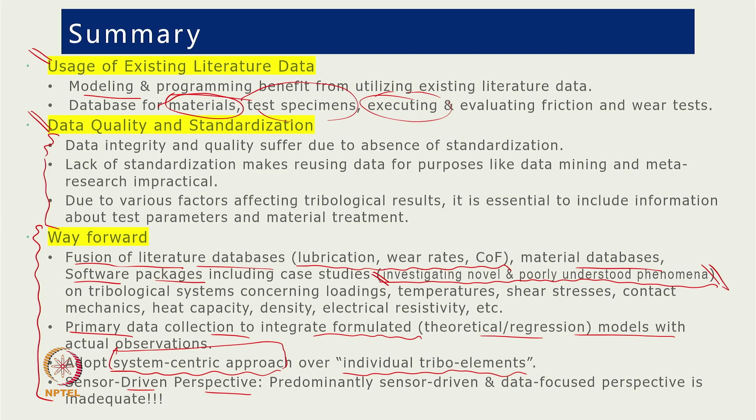Last, sometimes people say go ahead with a sensor-driven perspective. Again, I feel that is not correct. Sensors will keep giving results; we require a knowledge perspective. So I don't go ahead with sensor knowledge alone. We require sensor knowledge along with our domain knowledge and expertise, so that overall the results are fruitful. That's why I'm saying a data-focused perspective is inadequate, and we should not only believe in data. We need to use our domain knowledge and expertise. If we believe only in data, the results will not be very favorable. Complete automation requires a longer time. However, how effectively we can utilize the data to minimize our work is more important.